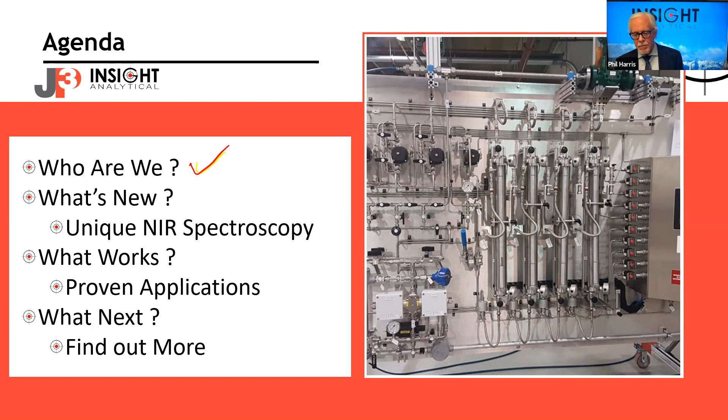So from the who are we side of things, JP3 is a company out of Austin, Texas. They're an equipment and information company that develops and sells online analyzers and data analytics solutions. And JP3 has brought some unique measurement capabilities together that enable us to implement things we've perhaps tried to do in the past in a way that's less maintenance intensive and easier to implement in online type applications.

As Chelsea mentioned, Insight Analytical is a systems integrator out of Calgary. We're a distributor and a technology development company as well. And we've had the privilege of being JP3's business partner and distributor in Canada since the launch of the technology in Canada. And Making Measurements Matter has been a vehicle, a website that we've been trying to put together, get more people involved in, to be able to give educational and informative webinars, whether it's about a product, an application, or a measurement issue.

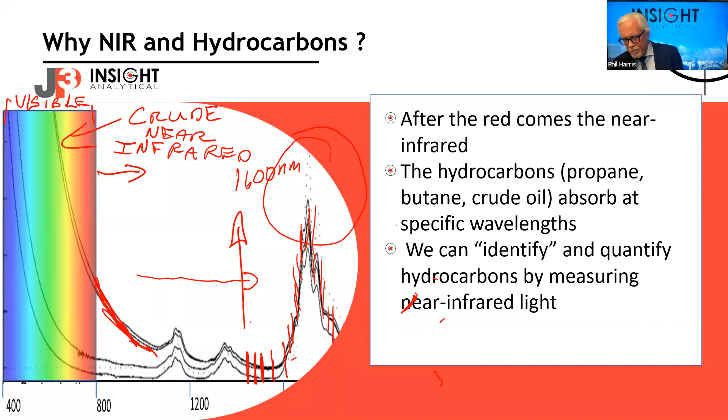So having a broadly tuned laser allows us to get the whole shape of that curve at high resolution with a monochromatic light source. The fact it's bright lets us deal better with samples like this. When we have a sample that's dark and dirty, it's got wax in it potentially or clay in it, we have difficulties getting conventional light sources through them. But we've got this intense bright laser now. So this makes it especially suitable for things like crude oils, condensates, things that would normally have too much background. We can start to use the intensity of these lasers to probe and get information in there.

The other thing about the particular spectrometer they use is it has a whole bunch of smarts built into it. It has automated wavelength calibrations, automated gain control and how bright the laser is, and that automated wavelength calibration. They do this kind of cool thing with two little Fabry-Perot interferometers, and it gives them a very precise wavelength calibration. And that lets the spectra from one unit be transferred directly to another unit.

One of the most impressive things I've seen done with this device is we can put a spectrometer out in the field, build a whole spectral library off that spectrometer, and move it to another spectrometer, and the library transfers over really well. So calibration transfer historically has been a difficult thing for near-infrared spectrometers. And the technology built into this device enables us to be able to do that.

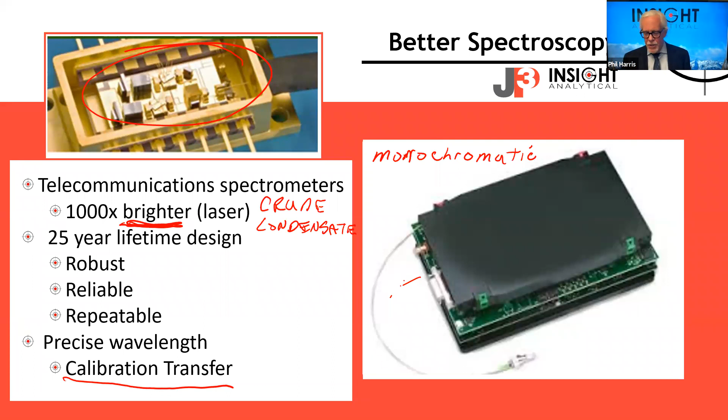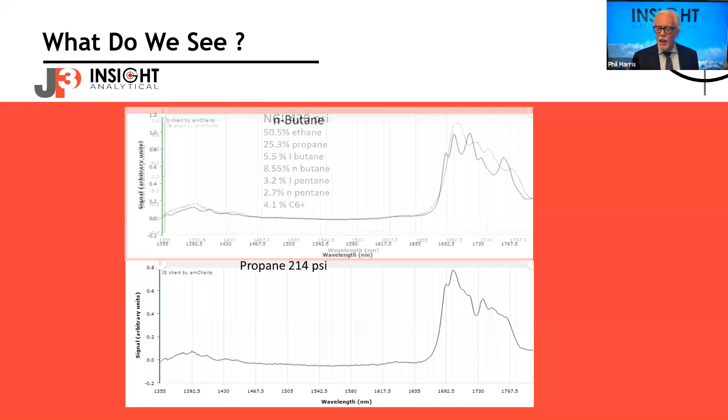So I want to talk a little bit about what we see when we look at spectra in the near-infrared. So this slide's animated. It's going to change on its own. The top spectrum is a natural gas liquid at 420 psi. So it's a mixture of ethanes and propane and butane and things like that. The bottom one was pure propane. The top one just turned to pure n-butane. And you can visibly look at these and say, by naked eye, I could tell the difference between these spectra. For individual components, it's not that difficult.

The problem comes in when we have things like a stabilized condensate, where there's a whole bunch of these spectra all sitting on top of each other. That's when the human eye, our ability to recognize the shape of the pattern and say what chemical is there, our ability starts to fall apart when there's a whole bunch of things overlapping.

But one of the other technological advances we've seen over the last decades has been massive improvements in computer speed. Computers are just faster, every year they come out and say, hey, instead of a 2 gigahertz processor, we got a 3 gigahertz processor. We got 8 cores instead of 4. We can crunch more numbers faster. And we've started to use sophisticated algorithms to detect patterns and shapes in all sorts of devices, including even personal use type devices.

Back when I went to university, computer science professors in artificial intelligence would say, well, we don't really know whether we're ever going to be able to get algorithms that can actually translate human speech because the waveforms are so complex and it's so variable. Well, everybody's phone does it now. Hey, Siri, tell me about that new spectrometer. And it does a Google search for you. And so we have these devices that use this ability to look at waveforms and patterns and turn them into actionable data. That's what we want to do with spectroscopy.

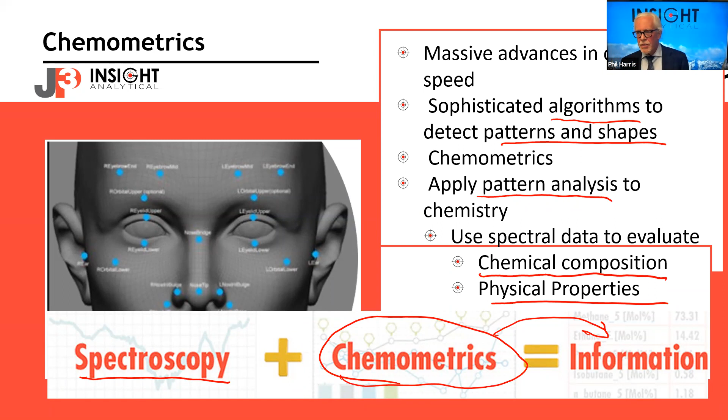When we look at sort of traditional analyzers, whether it's a chromatograph, whether it's an online vapor pressure analyzer, a lot of these were built around laboratory techniques where we could bring a sample in the lab, we can let it sit there for a day and have the particulate settle out of it. We can centrifuge it, we can do all sorts of things to clean up the sample before we try to take a measurement.

But when we go to do that online, if we pull that same sort of technology over there, we end up having these, if you like, sort of more complex sample systems, where we have to do a lot of things like continuous filtering, pressure regulation, flow control, flow regulation. And we also end up having a lot of small tubing runs in there.

Both of those work great in the lab, but if I'm dealing with the fluid that comes out of a crude oil well, or the fluid that comes off the bottom of a condensate stabilizer or an inlet separator at a gas plant, those things will have sand, clay, wax, bitumen, asphaltenes, dead mice. I mean, we don't know what's all going to be in there. There's going to be difficult things that make it hard to actually take a sample.

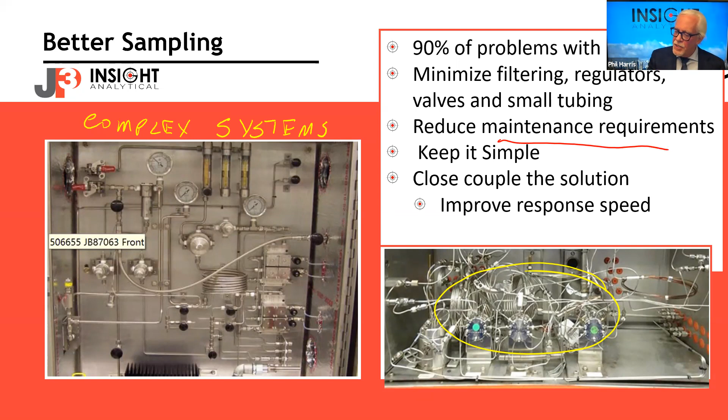And so if we want to reduce a lot of those maintenance requirements, what we end up looking at is saying, well, is there a way that I can keep it simple? Can I close couple this solution and improve response speeds and get faster response times?

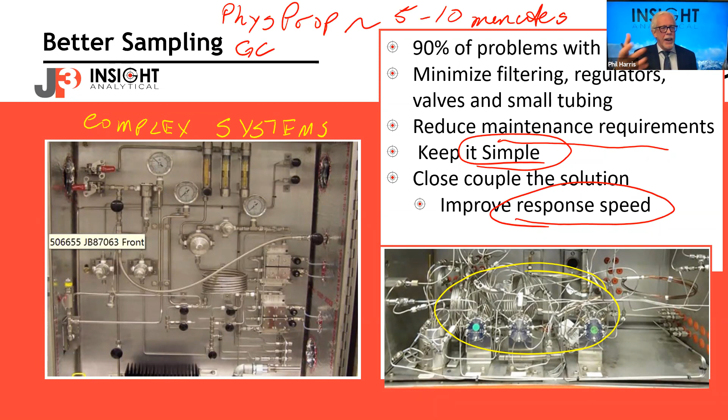Because many of these sorts of analyzers, a typical phys prop analyzer, like an RVP analyzer or a gas chromatograph doing composition, we may see response times on the analyzer in 5 to 10 minutes, and we may have even longer delays than that on the sample system. So a lot of the data that we get can be almost outdated by the time we get it, depending on how fast the process can change.

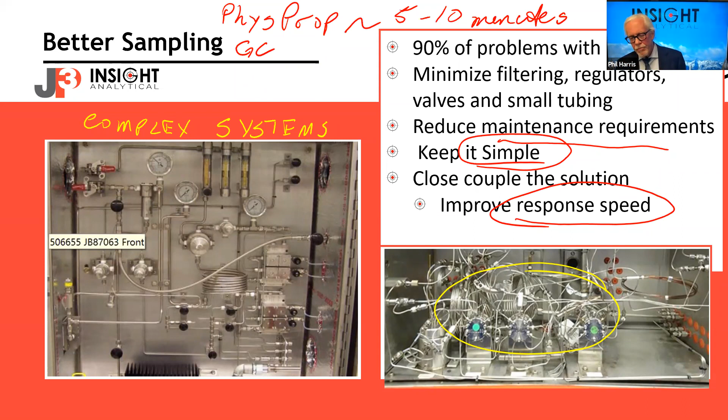So instead, there's a couple of pieces that have been done to try to take this measurement right to the operating process. And one of the pieces of that is how we actually get the beam of light to go through the sample. So the flow cell is basically a solid block of stainless steel, 316 stainless steel, which becomes important to us because we concern ourselves with corrosion and NACE.

And it has these nice large ports, 1/2 inch NPT, no 1/8 inch tubing. We want nice big ports that things can flow through easily. And so we allow our process fluid to flow through those nice big ports. Big tubing, doesn't plug as easily, can run a lot of flow, helps it be a little bit more self-cleaning.

Inside that block, we put a synthetic sapphire core. Looks just like this one. And the beauty of these is they transmit light really well. You can see it's clear as glass, and it transmits light very well in the infrared as well. But the other part of that is it's the second hardest naturally occurring material next to diamond.

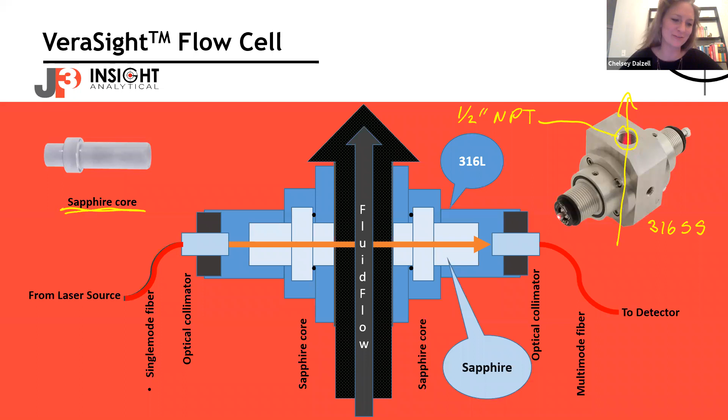So the thing with these is that because it's hard, we don't have to worry about it being scratched by sand, clay, bitumen, things like that. And so we can maintain good optical transparency for long periods of time. And in fact, because it's polished so smooth, the flow going by it, if we run enough flow velocity, it tends to become almost self-cleaning.

So we take those two sapphire cores and we put them inside of a block, kind of just like this one. So now we've got these two sapphire cores in there and a nice big flow path for our process fluid to run through. So process fluid is going to be running in. That's where my pen's just about to, there we go. So process fluid just runs in between those two sapphire rods.

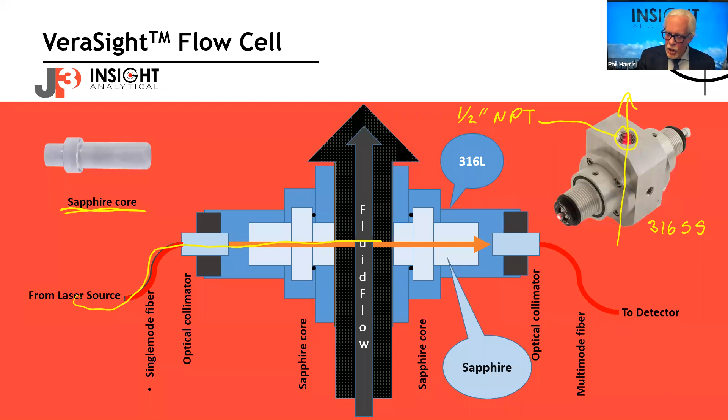The black pieces you see on the end here are just fiber optic collimators. So we connect fiber optics and shoot a beam of light through those sapphire rods and through the fluid that's flowing between there. So now we have this process fluid, whether it's crude oil or whatever. We take this beam of light, we shoot it through there, and we bring it back over to the spectrometer.

So the advantage we see here is that we have these large flow paths that are going to be resistant to being plugged by things like sand and bitumen. So this lets us kind of change our approach to measurement. Traditionally, we have pulled a sample out of the process, transported it through sample lines over to an analyzer building, and put this analyzer that really needs to be in a well-protected environment inside this analyzer building and tried to condition the sample so it's compatible with the analyzer.

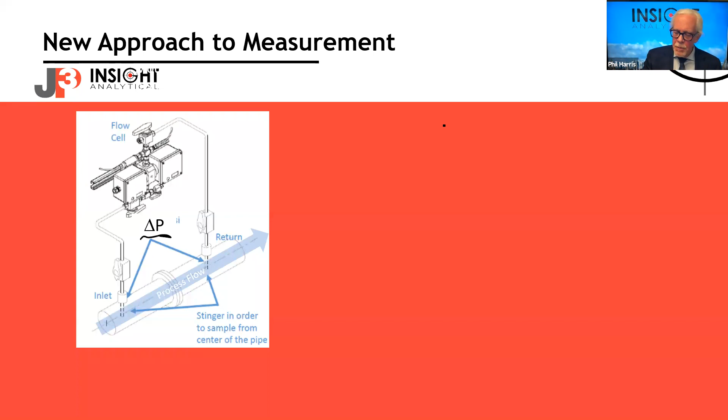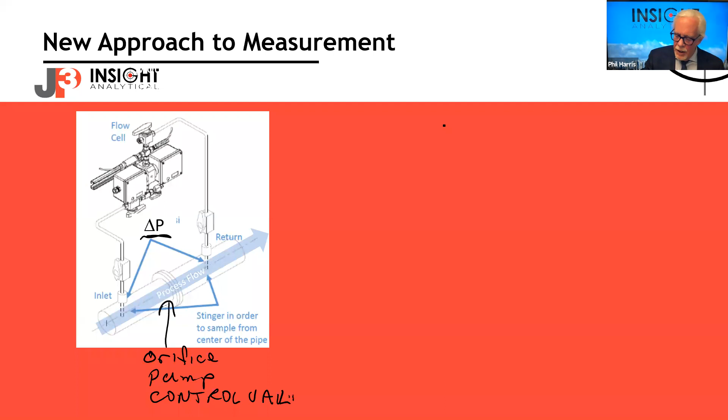Instead, now we move that flow cell out as close to the process as we can. We look for some source of differential pressure. You know, it could be an orifice plate, could be a pump, control valve, could just be a diameter change or some pipe elbows. We don't need an awful lot of differential pressure because we're really close and because our lines are really short. We typically try to keep these transport lines less than 5 meters. We run nice big lines like 1/2 inch tubing. So we have large diameters, so we don't have much pressure drop.

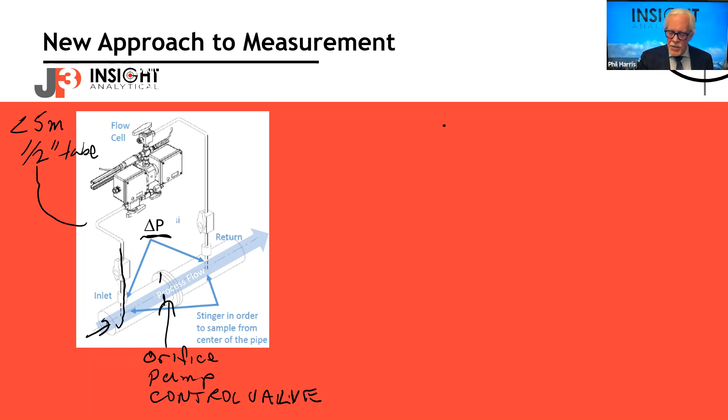If our direction of flow is going here and we have some kind of a flow restriction, the pressure is higher on this side, so it drives flow out through that flow cell, return back to process. On a condensate stream or an LPG stream, we'll see these running readily with 2 or 3 psi of differential. So we don't need a lot of delta P. We just need something to be able to drive some flow through that flow cell.

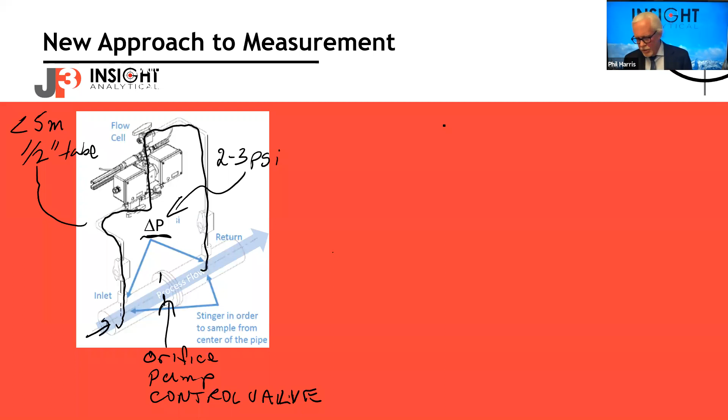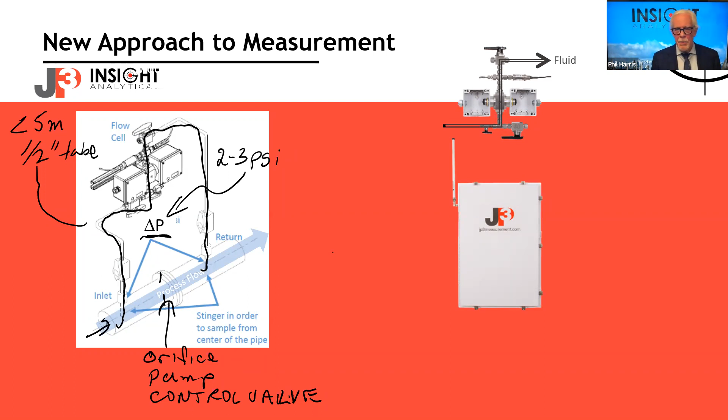So we have the process fluid flowing through that flow cell, and then we can mount the analyzer anywhere else. The connection is by fiber optics. We're not bringing process fluid back to the analyzer. So we mount the analyzer someplace like an MCC building, a control room, and we shoot a beam of light.

Sorry, Phil. I'm so sorry to interrupt you. There's a question. Puzic, P-U-Z-I-C. Yeah. Did you see that? Reiko, okay. Yeah. Hi, Reiko. You good? Yeah. Okay. Yeah, it was funny.

We were just teaching a class this morning and talking about where we put probes and where we take samples from, and how it's often not a good idea to go across control valves because the amount of differential pressure changes so much. And so you see people do it a lot still. You go to a lot of existing installations, and you'll see people sampling across control valves. But there's certainly issues because the differential pressure changes.

And as Bob said, we don't actually need a stinger on the return side. We can return it right back at the pipe wall. Did you see the second part from Robert? Yeah. Sourcing from near the centroid of the pipe certainly is where we want to be.

So we have that fluid flowing through there, and now we take this beam of light, connect it up over fiber optics, and shoot it through that flow cell, and bring the light back over to the electronics box here. This is where the spectrometer is, and this is really where the brain is. This is where we bring that fiber back, make those measurements of the spectra, and use those sophisticated algorithms that

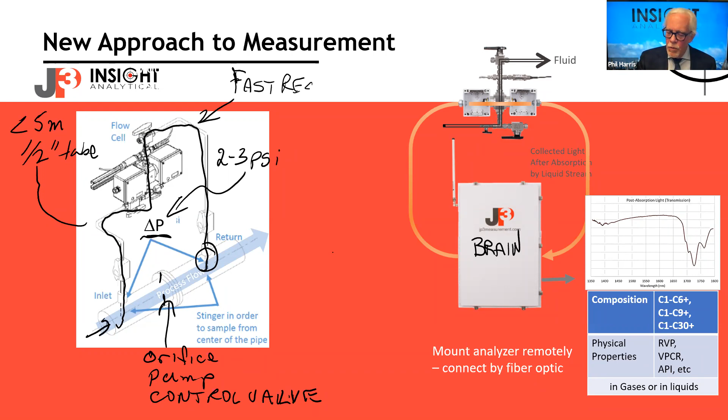Because we're close coupled here, mechanically, we get fast response. We have really short sample lines, so we get into that flow cell quite quickly. Similarly, because it's optically based, we can make the measurement quite quickly. So we get a measurement response that updates typically every 15 to 30 seconds.

So having that fast response lets us tighten up control loops. If we're doing things like blending butane into crude, or trying to optimize a deethanizer or a fractionation plant, we can make those measurements quite quickly and provide near real-time control.

One of the other advantages is that one of these boxes can handle multiple fibers, so we can do multiple measurement points. JP3 has made this available right now in three configurations: a single measurement point, which seems to be very suitable for things like a small crude oil blending skid, up to 4 measurement points, or up to 8 measurement points. So depending on how many sample points you have, we can put a different configuration in.

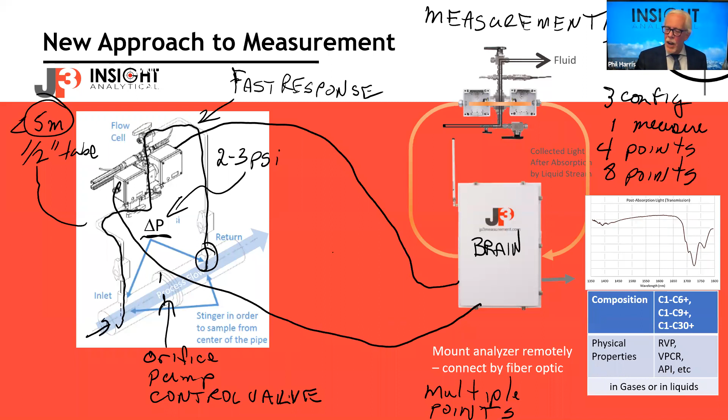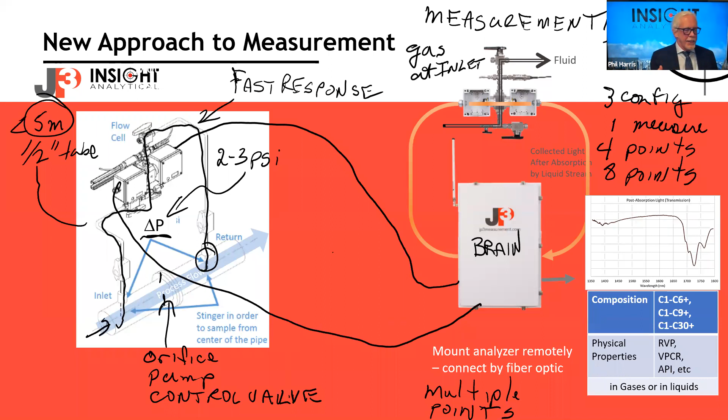And to do a second measurement, it's simply a matter of having a second set of fibers. So I can bring my second measurement out and bring it back. They're completely independent. They use the same spectrometer, but different flow cells and different fibers. So the one over here might be a gas phase measurement at a plant inlet, looking at compositions for allocation strategies. And the one over here could be a condensate stabilizer or a crude oil blending.

So unlike a lot of conventional technologies where we'd say, if you want to do a different application, you have to put a different type of technology in or a different configuration of the columns, we can basically use one spectrometer to do multiple different measurements at different places in the plant.

There's not a limit, or I shouldn't say that, there's always a limitation. The limitation isn't so much any optical parameters of the fiber as much as it's a custom fiber, so there's a cost increase if you go with longer fibers. So there's a point where maybe I should just put a second analyzer in instead of trying to spread these measurements out too far.

So there's a few unique things here now. We've taken measurement right out to the process point, which gives us fast response. We haven't tried to transport this sample, so we don't have to worry about phase changes. One of the big problems when we're trying to do measurement is we try to move a sample over a long distance through a piece of tubing. We get pressure drops or temperature changes, and phase change happens. We do all of our measurements here at line temperatures, at line pressures.

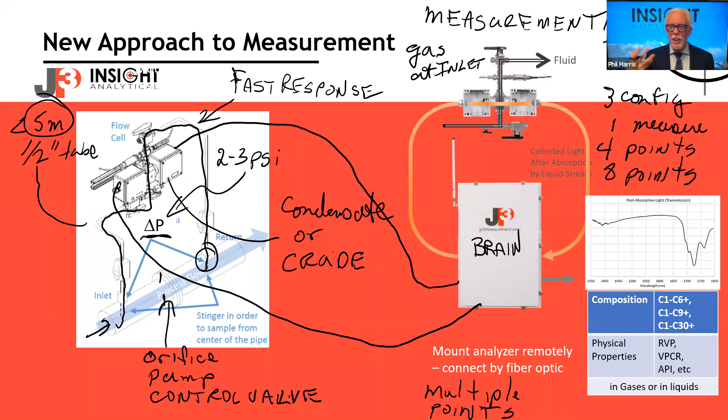In Canada, we have a CRN requirement. So in Canada, we can go up to 600-pound ANSI class systems, about 1,500 PSI. The flow cell actually had to be tested to 10 times that to get through the CRN requirements, so it was tested to 15,000 pounds. Sapphire, because it's the second hardest material, has great stiffness as well, mechanically strong. So we can run this on high temperature and high pressure processes.

Hey, Phil, there's a question in the chat from Andy. Are multi-point measurements made simultaneously or offset in 15 to 30 second segments, i.e. cycle time? Good question. I should have mentioned that. Because they're separate flow cells, they're offset. So we measure flow cell number one, and let's say we get an update after 15 seconds. We switch the laser to go through flow cell number two, get an update on that one. So if you had 4 measurement points, you may be looking at up to a 2-minute cycle time.

You can optimize that if you want to. If one of your measurement points is more important than the others, you can say, measure at measurement point 1 three times, then measure point 2, then go back to point 1, then measure point 3, then go back to point 1. So you can optimize that if you have one measurement point that you really need updated fast and the other ones you're willing to have go slower.

Installations then become, because we don't have to put in pressure regulation or a lot of flow control and a lot of these things, relatively simple now. We look for our sample supply point, bring a sample over to the analyzer. We will typically put in a flow switch, temperature transmitter, pressure transmitter. We like to know that we actually have flow to the analyzer. What are the temperatures and pressures of our sample?

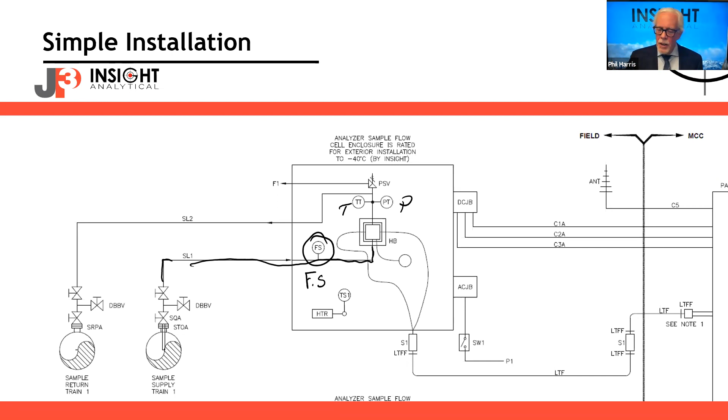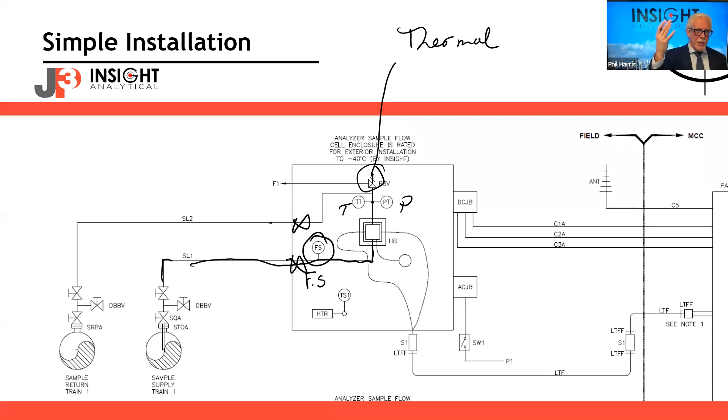The PSV that's here is just a thermal relief. We don't need a PSV for any kind of pressure protection because of the high pressure ratings of the cell. And realistically, there should have been ball valves or isolation valves shown here and here. The reason we have that PSV there is if somebody isolates the sample and the liquid heats up, when the liquid expands, we want to let it have a place to release.

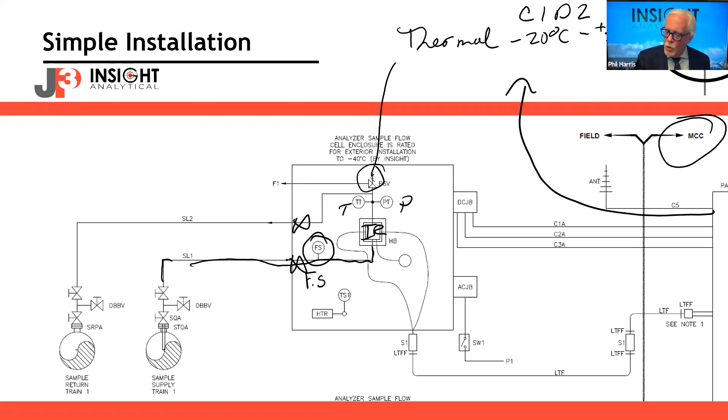The IR cell is sitting in the middle, and we bring the fibers in and out and bring them back to some safe place. Often we'll end up just going to an MCC building, a control room, any kind of cabinet where there's a bit of temperature control. The electronics part of this is Class 1 Div 2, minus 20 degrees C to plus 50. So in Canada, certainly we need a temperature controlled environment because minus 20 degrees C is a good day some winters, right? So in the US, a lot of times they'll just put this outside underneath the sunshade.

So to give you an idea of how simple an installation can be, this is a crude oil blending skid. There was a gas plant nearby that had depropanizer bottoms. Deprop bottoms are mostly butanes, pentanes, hexanes, and they were getting their deprop bottoms trucked away. Nobody pays a lot for deprop bottoms in South Saskatchewan, and trucking costs money.

Nearby, there was a crude oil battery, crude oil storage tanks. And they said, well, what if we pipe our deprop bottoms over? They blend it into the crude oil, make sure they hit the pipeline vapor pressure spec, and we get to sell our deprop bottoms now as if it's crude oil. So this skid is basically here to blend C4 pluses, butanes, into crude.

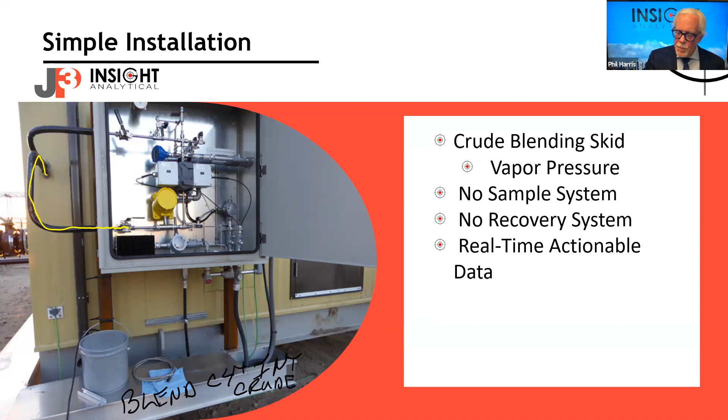So the blending is going on inside the building. Sample comes out, goes past my flow switch. My infrared cell is sitting right here. Temperature and pressure is sitting right here. Returns back into the blending skid. No sample recovery tanks, nothing like that. Just take it out over a little orifice plate, a little place where they get some differential pressure.

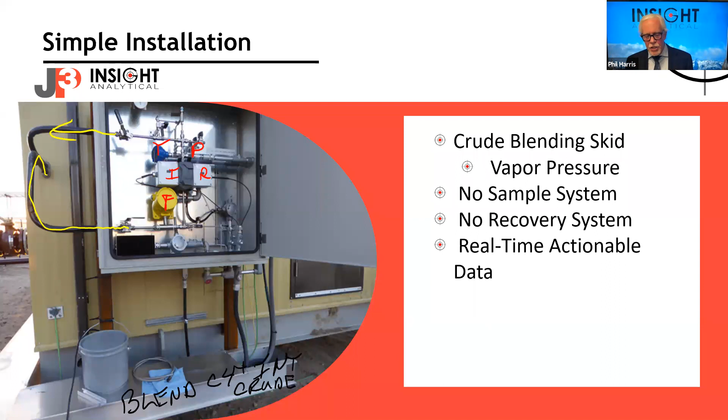Let's give you a bit of a zoom on what's going on in here. So, we have a little heated cabinet because it's in Canada. Explosion-proof heater sitting down at the bottom. Sample comes in, goes past the flow switch so we know we have flow, goes through the infrared cell, temperature and pressure measurement, return back into the blending skid. Fibers going in and out. Those go to the analyzer that's mounted in the control room for the blending building.

So, one of the things that we talk about is trying to get reliable measurements. They don't have an instrument mechanic out here. They don't have an instrument guy to maintain this. And so it just sits out there and chugs and runs and runs. We were almost at the point of wondering, well, are they actually using the data? Because we haven't had a maintenance call for this thing for anything.

And it's interesting, Doug's on because Doug manages our field service group and he gets a call on a Sunday. We haven't been out there for 9 months to do any maintenance, and the guy phones and says, we lost data communications over Modbus to the analyzer. We can't blend if it's not running. Can you help us get data comms up? No one had cleaned windows. No one had done any recalibration. 9 months of continuous operation doing vapor pressure with virtually nobody touching it.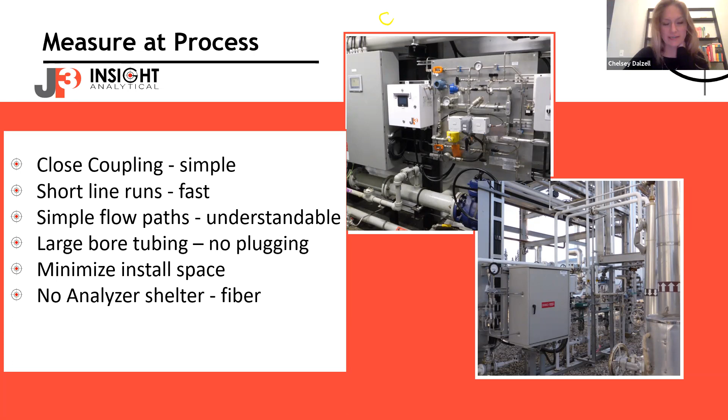Sorry, Phil, there's another question in the chat from Alan. Oh, thank you. Is the measurement temperature sensitive? Good question.

Yeah. So when we build models around these things, when we put one of these in, we have to pull samples for the lab and look at the spectra and build the model around that. And so we want to do that over the range of temperatures that you would typically operate at. And so if you see a really big temperature excursion from where you're normally operating, you may have to add additional data into the model.

Oftentimes though, if we're going on a processing vessel, if it's something like a condensate stabilizer or a deethanizer bottoms, those are often running around the same temperature most of the time. One of the nice things about liquid is if it's flowing, it's got a lot of heat capacity, so it doesn't change temperature very much as it flows along the tubing, as long as you have enough flow rate.

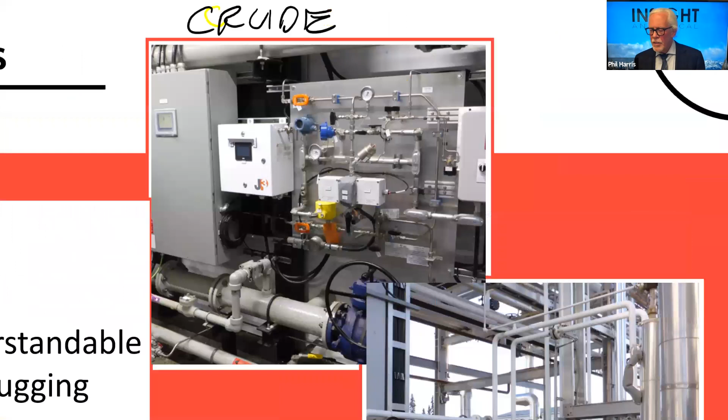So on some of these, like actually, I think the one up, is this one? Yeah, so on this installation, unfortunately, my pen won't draw. Let me just do this before I zoom that.

So on this installation, there's a second tubing run that runs around in parallel to the cell. It's all in 1/2-inch tubing. And what we're trying to do is keep a lot of flow going through those transport lines because it helps them to keep running at the typical operating temperatures of the facility. The more flow we put through there, we have a fixed amount of heat loss to ambient, and so we don't change temperature of the product much from a cold day to a hot day. So there's one flow path that's bypassing and one that's going through the cell.

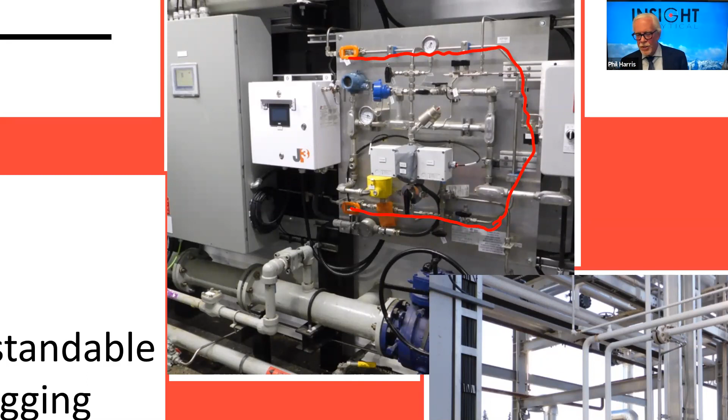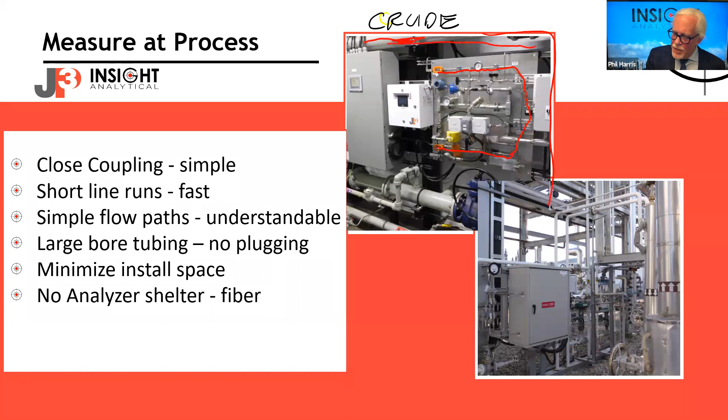So again, this is a simple installation on a crude oil blending skid. We have crude that's being diluted with butane running through a pipe that's off the side of this picture and then returning back. One of those single stream spectrometers sitting right beside the panel. On the panel here, our sample comes in, goes through the flow cell, returns back to process, and we have that little bypass loop. And we're getting a continuous measurement here of what some people would refer to as RVP. The spec describes it more as VPCR4 now, so the vapor pressure at a 4-to-1 expansion ratio.

And so the client specification is, on the blend, you can't go more than 95 kPa. The more butane he can push into that crude oil, he buys butane for $10 a barrel, sells his crude for $50 a barrel Canadian, puts that butane in and sells it as if it's crude oil. It's like watering down your whiskey. You get to sell an inexpensive product as an expensive product, and so you get to increase revenues there, right?

Again, this one is sitting on a deethanizer. The deethanizer tower is right over here and the sample panel is sitting right beside it. Close coupling makes things simple and short line runs make it fast. Simple flow paths, not much for a technician out in the field to try to figure out where it goes. It goes into this manifold and then it comes out here and out there. Basically, it's a 1/2-inch tubing run into the analyzer, 1/2-inch tubing run out. Large bore tubing, it doesn't plug.

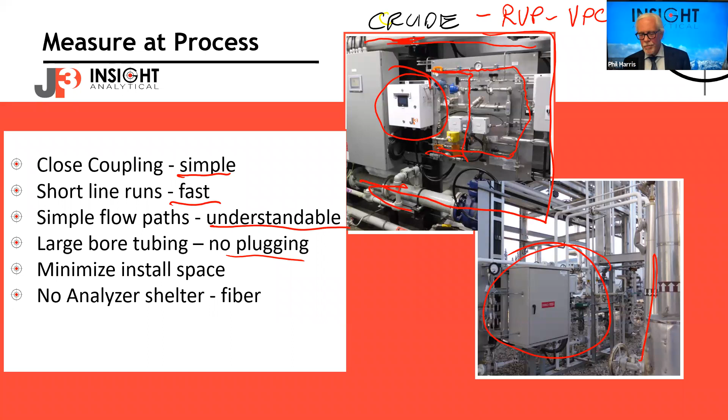So here's an example of that. Out there in the Canadian snow, we had this cabinet mounted out at the bottom of a condensate stabilizer. It's very similar to the cabinet that you saw on the crude oil blending skid. Flow switch, temperature, pressure transmitters. Mounted out in the middle of the plant. Over here is their MCC building.

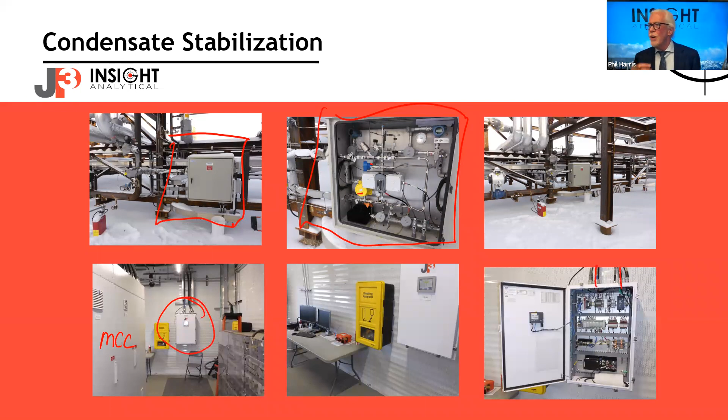They put the infrared analyzer up on the wall, dropped power and fiber into it from the top, and it now just sits out in that building. There's no gas coming back there. We don't have to put gas detection in. We don't have to put any special controls around this device now. Really cuts our installation costs.

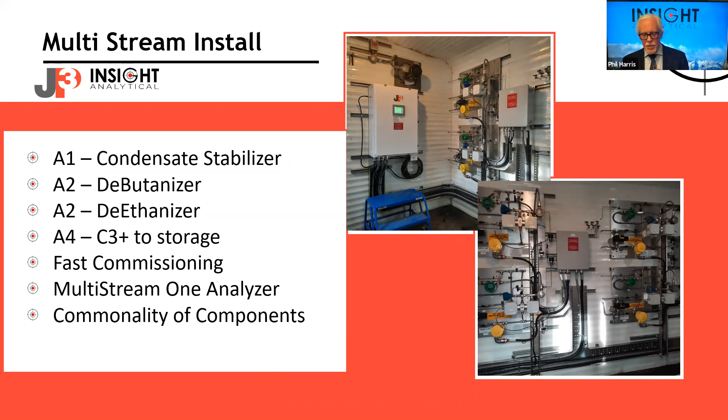Multi-stream installation that we just did recently for a gas plant up here. 4 streams: condensate stabilizer, fractionation plant, debutanizer, deethanizer bottoms, some C3+ that's going to storage. We build all the panels at our shop, drop them out in the field, mount them on the wall, and hook up the analyzer. Again, when we zoom in on these, those are two separate flow paths.

Infrared cell; the two white boxes are just protecting the fiber. The yellow part is the flow switch, temperature and pressure right above them. This panel right below it, actually the green, I think, is the temperature transmitter. We use E&H transmitters out there, Doug. Is that the green ones? Yeah. So we've got Foxboro, actually. It's an old Foxboro control system type plant. Right. So we use Foxboros for the transmitters.

And right, this is an existing GC building. They pulled them out to put this in. So what happened was the plant had GCs trying to measure the condensate and the debut bottoms. And they said that because of the maintenance costs, between carrier costs, replacing injection valves, having to do maintenance on stream switching and all that sort of thing, they were spending $50,000 a year just on maintenance parts, never mind on the labor side of it.

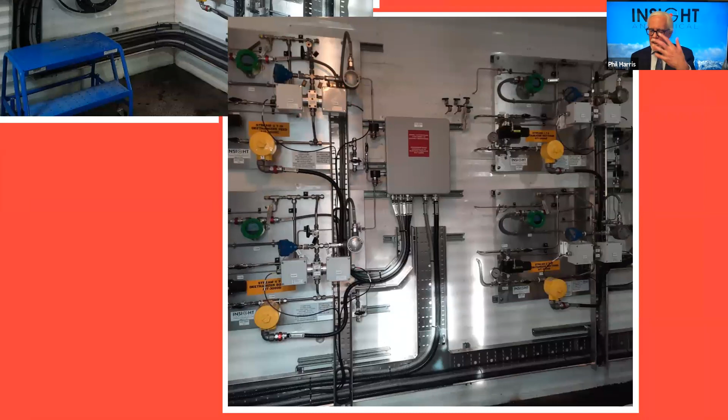And they said, well, if we go in there with no moving parts and put a system in that gives them the same data, but 10 times faster and with less maintenance, they can see an opportunity to optimize production. So we have two panels mounted right there next to the analyzer and the other two panels mounted on the wall nearby. So there's 4 streams inside this little building with the infrared spectrometer right beside it. Fast response, all the data coming in over Modbus allows them to put better control systems in place.

I'm running a little bit late here.

So we look at advantages and disadvantages of both methods. The big advantages of the near infrared methods is that we can measure at process temperature and conditions, as compared to transporting a sample and worrying about phase change along the way. We can use large bore tubing and not put in filters and regulators, so we do those measurements without a bunch of those maintenance parts. Another client said on one of their condensate streams on a blending skid they change filters every 2 or 3 days, and the filter costs add up.

Fast response time, typically better than 1 minute, often 15 to 30 seconds. We can do multiple measurements with one analyzer, composition and physical properties all at the same time. With traditional analyzers, I'd have to put in an individual GC to do the composition and then a physical prop analyzer to do cloud point or pour point or vapor pressure. The advantages potentially of a GC are that they do direct measurement, measuring an individual peak to get to a component, whereas on near infrared or any other inferential analyzer, we have to build models.

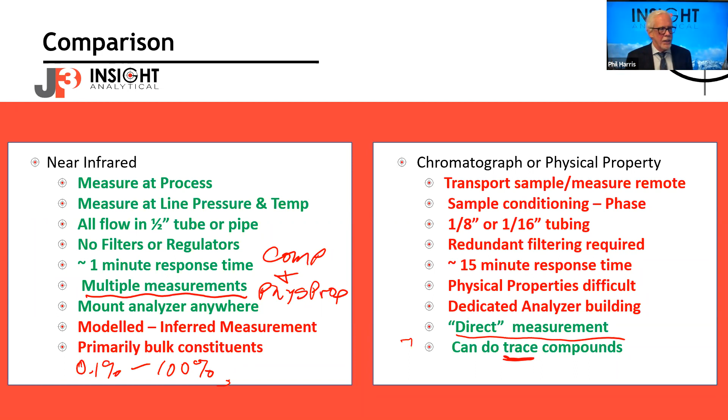The other advantage potentially on a chromatograph is they can do trace components. They'll go down to single-digit ppm measurements in complex mixtures, whereas with spectroscopy, because most of the spectra overlap, we're primarily looking at bulk constituents, in the 0.1% to 100% range. Whereas a GC might go down to 1 ppm or less, right? So as we go through,

That question from Michael Sprague: deployments in fuels blending for product certification. Greg or Steve might be better at answering that. We haven't done as much fuels blending up here. We've done butane blending into crude, butane blending into condensate. But for blending into gasoline, we haven't done that application up here in Canada. I don't know whether any of the JP3 guys from the US might want to jump in.

Hey, this is Steve. Phil, yes, we have done those applications in the States. For gasoline, either blending in or the final control point on the downstream side of the blend. So things like vapor pressure in gasoline, right? Yeah, RON, MON as well. DVPE as well. So if Michael wants to reach out with any more details, just circle back.

I got a few questions. Paul, how you doing, man? Well, there's one before that.

Dealing with water and moisture content impacting the spectrum. It all depends on the amount of water and moisture. So typically, if I just quickly go back here, sorry, just bouncing back to where I can show a spectrum. Typically, we'll see water in the NIR right around here. Actually, that's probably shifted a little bit more that way. I think its center is close to 1460 or so.

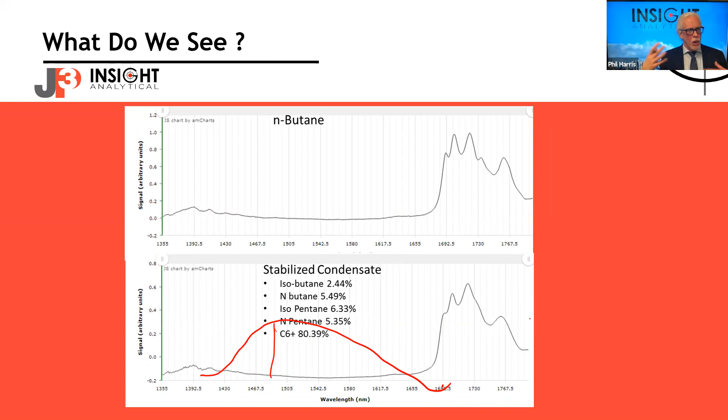And so if it's not a lot of water, we'll just see it as a background hump that's there. We can still do all of our spectroscopic measurements. If you get huge amounts of water, it can start to overlap some of these. But we had a client who was doing startups on a condensate stabilizer, and Doug and our other service guys

would look, we have satellite connection or cellular connection to the analyzer, and they'd look at the analyzer and phone the plant and say, you guys have water in the bottom of your condensate stabilizer again. You guys got to look at your level control on the inlet separator.

So we can deal with some of it in the background, and it does impact the spectrum. We'll sometimes generate alarms saying we've got an unusual spectrum shape here because there's water there, but we can often get a decent analytical measurement.

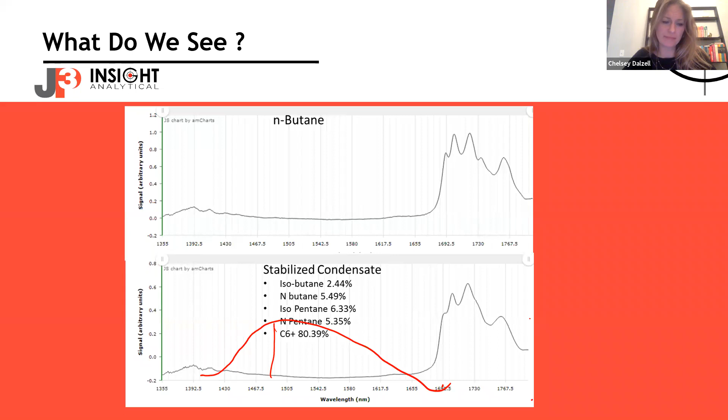And then Paul's question as well. Did you see that? Yeah, I'm just seeing it now. Hey, Paul, how you doing, man?

No, we don't use real-time input of the temperature variations as part of the chemometric models. We try to build our models across a wide enough range of temperature variations that we kind of minimize the sensitivity to that.

And the models, as you put in more principal components, or latent variables, you kind of build some of that in as these are the kind of spectral changes we see, but it's not used as a part of the inputs. We don't typically do online validation, so we don't run a validation fluid.

What we usually do with customers is say, pull a sample, check. Most custody transfer agreements are based around lab results. And so we tell people, look, pull samples, compare us to the sample you just pulled from a qualified lab, and see if we're still in specifications.

A lot of the customers that we have that do things like blending will have a local lab, and they'll just say, well, my lab can only get me 4 or 5 samples a day. They get to see how the analyzer's comparing to the lab, but they do real-time control with the analyzer.

And then the last one, chemometrics is performed by a commercial. Yeah, okay, got it. I have Eduardo, how you doing, buddy? How's things in Brazil? You have to get me down there again.

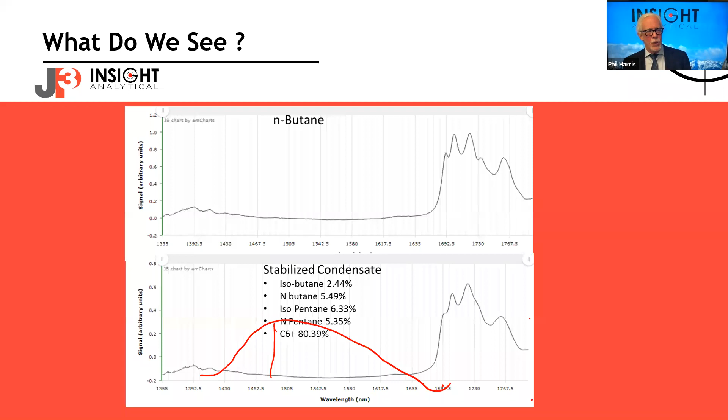Yeah, the chemometrics is done basically using a MATLAB-based platform that's running on the analyzer itself. So they have not traditionally been using third-party chemometric software to do it. With a lot of the installations, especially launching a technology like this as a relatively new thing in North America, a lot of what we've done to date has been using JP3's chemometricians to build the models based on the software that's there.

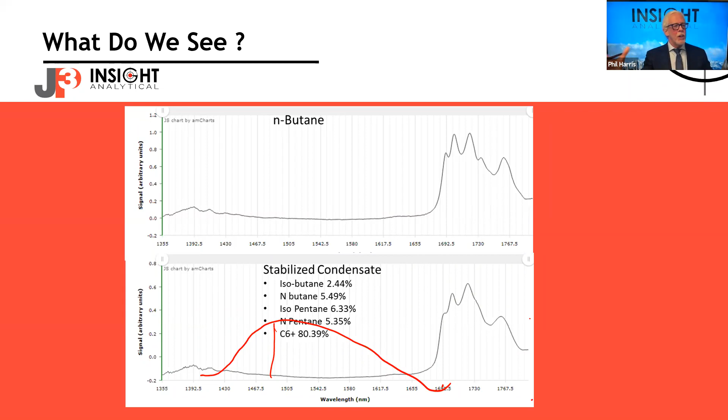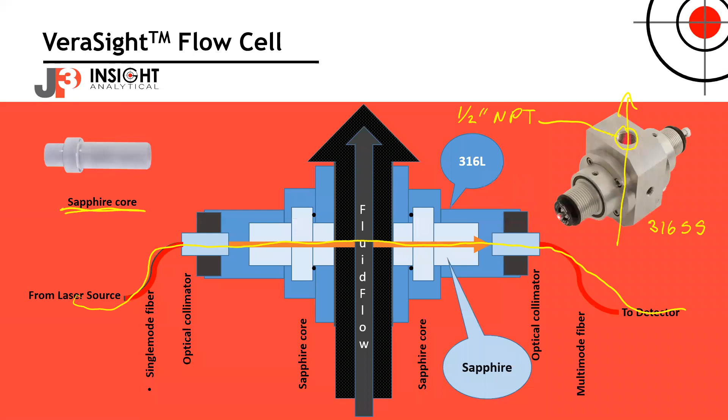With looking at more international markets, the ability to use other software packages and let people do their own chemometrics is certainly becoming more and more important. And I know, Eduardo, you guys at Petrobras have done a lot of the chemometric stuff down there. I've looked at a lot of the papers that have come out of Petrobras. So I'm going to skip through some slides here.

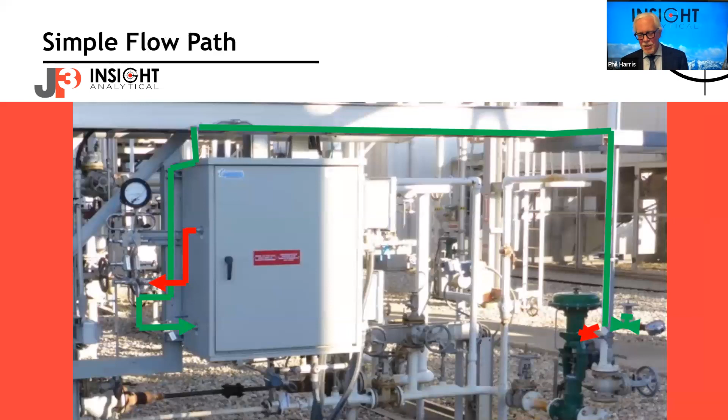So again, you were sort of saying there's a... Sorry, Phil. Paul is asking another question. Does the sample cell have a means of easy cleanup for possible fouling? Yeah, fouling. It's real easy for me because I'm not the guy who has to go out in the field and do it.

Doug is, but Doug's done a lot of them, they're pretty quick. How long does it take you to do window cleaning, Doug? It's not very long. Start to finish, 20 minutes easily. Yeah. If you really want to see, go to YouTube and punch in JP3 and you can see a demo of it.

It's basically 4 bolts on either side of the cell, lets you take it off and get the sapphire rod out. And then it's just cleaning the sapphire rod. And because it's so hard, a lot of times the guys will just use a rag and brake fluid. Brake fluid's almost this universal solvent.

For some of our systems as well, where they had wax issues, because the analyzer is continuously measuring how much light transmits through the cell, if the optical transmission drops, we have a system in place where we backflush the thing with toluene, and that dissolves any wax that might have built up on the cell windows. So we can automate that cleaning as well.

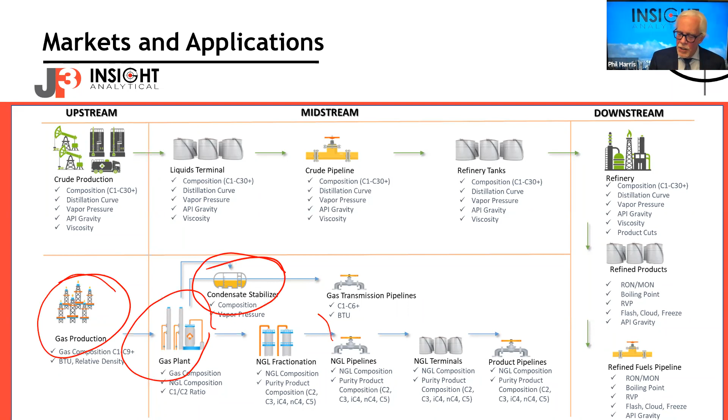So over the course of the seminar series, we're going to try to touch on most or all of these applications. But where I'm going to focus today is more on this gas plant, condensate stabilization, and NGL fractionation side of things.

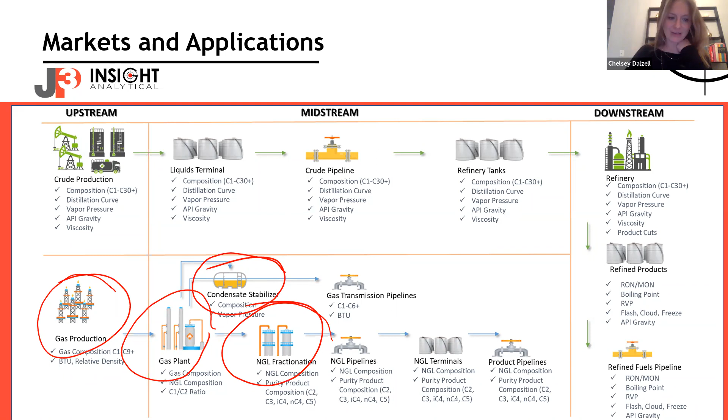So one of our first applications, the first installs in Canada, was really interesting for us because we were a relatively new company. We're bringing this technology into Canada, and we get an RFQ from a big engineering company, and they say, our client wants to measure butane in natural gas condensate. So what you guys in the US refer to as natural gasoline, up here we just refer to as condi, but it's kind of a C5 plus stream.

And the engineering company says, we want to measure butane in condi. So we run through the whole job, engineer it, build it, ship it, install it out in the field, and meet the process guy and the measurement guy. And they go, well, butane's an important number to us, but really what we'd like is to know the C1 through C4s in liquid volume percent. Our process guys would like to know C1 through C12 in mole percent. And we'd like if you could give us the vapor pressure too.

And we're on site, and we talk back with the chemometrics guys back at JP3 and kind of go, what's involved? And they say, you're going to have to pull a lot more samples. We're going to have to spend more time building models, but we can model all of that off the one installation. So we ended up being able to tell the client, look, there's no hardware changes. We just have to pull more samples, do more lab analysis, build bigger models.

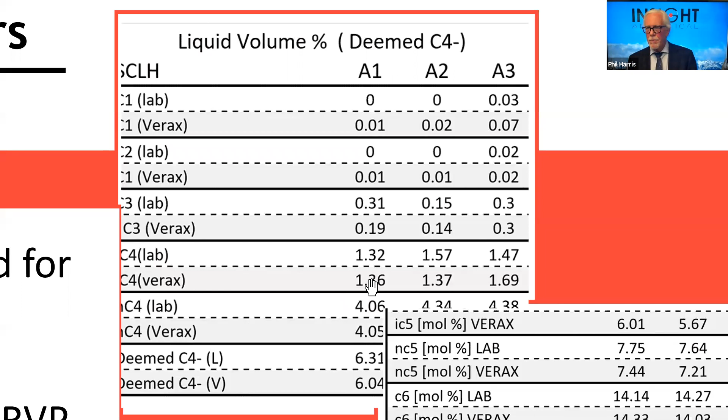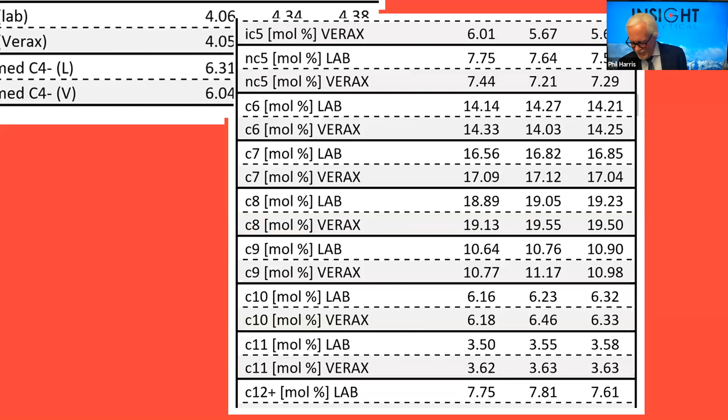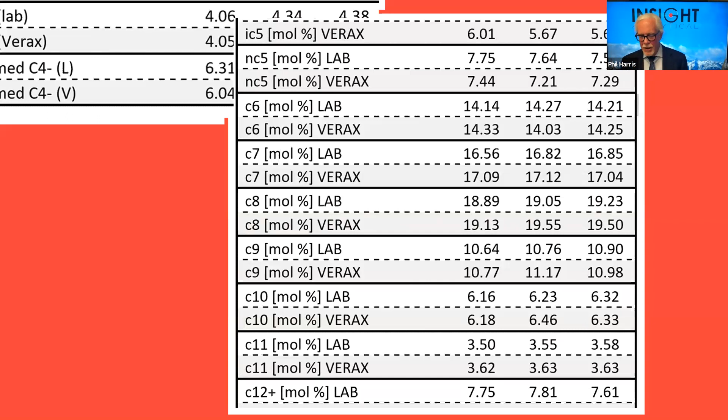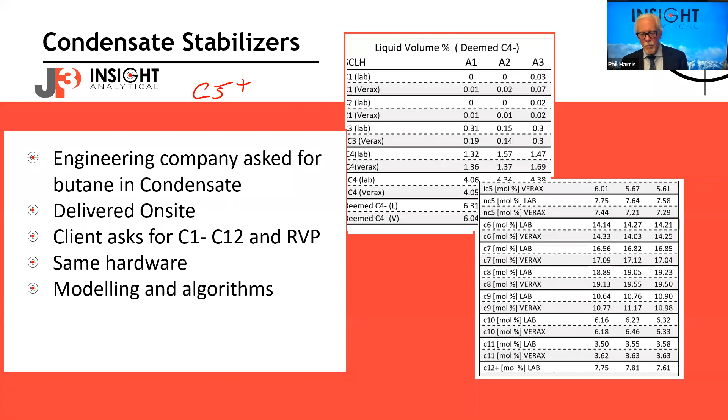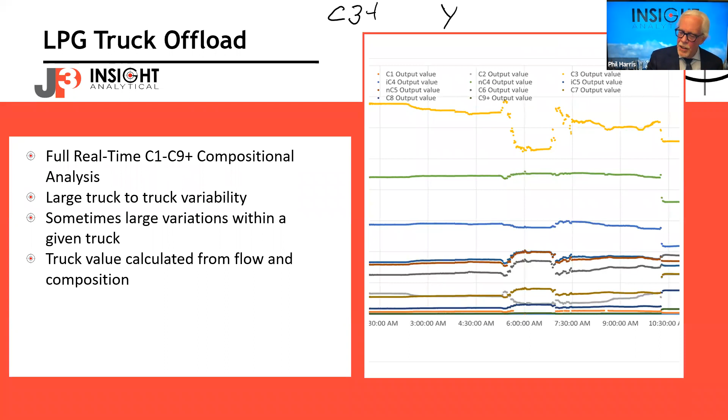So exact same hardware, almost a completely different analysis set, all done and providing them real-time results. We also did a truck offload for this client, and so they were looking at trucks coming in, and as a truck offloads, this is a C3 plus. What we up here in Canada refer to as C3 plus, the US tends to refer to as Y grade. But it's a C3 plus hydrocarbon stream.

And what they wanted to be able to do was when a truck offloaded, take a data point every minute, look at what flow they're getting off the Coriolis meter every minute, and do a flow weighted average of the composition of the truck. We gave them basically a full C1 through C9 plus every minute, and they're flow weighted averaging that and saying this is what the value of that truck is.

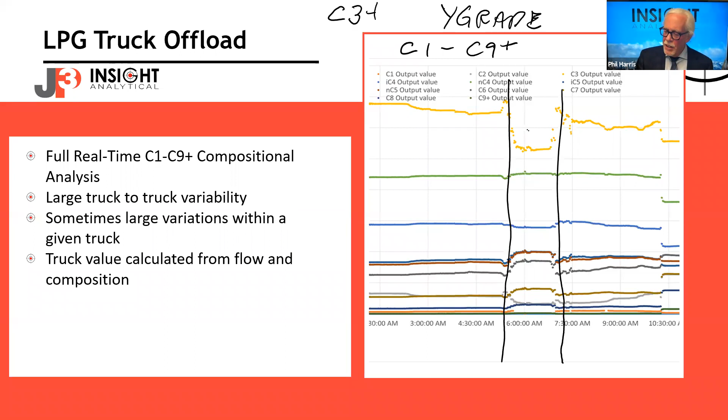And the reason they want to do it, you can kind of see at the end of this chart. This particular truck that came off is relatively low in propane and higher in butanes. And the next truck that comes in was higher in propane and much lower in butane. And the butanes and the heavier have a lot more value to them. So they wanted to be able to say, how do I evaluate each of these trucks?

The alternative, the way people have traditionally been doing a lot of this, is once a month, they would go and pull one lab sample and say, hey, this is a lab sample from, who am I going to pick on here? This is the sample from Eduardo's plant. And this is what he gave me on this sample. So that's what he's going to give me all month.

Well, Eduardo's smart. He knows I'm coming out there on Tuesday. So he makes the best product he can on Tuesday. And then I pay him the most money all month. So instead, they said, I want to be able to look at each truck that comes from every plant in real time.

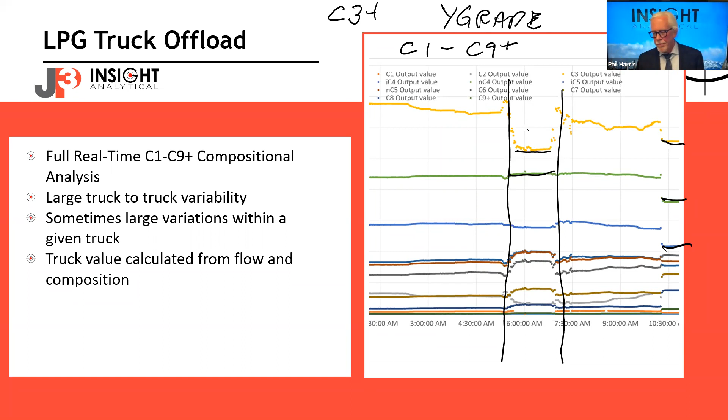From an installed base perspective, there's over 225 installations of this technology across North America now, over 600 measurement points, pretty much in every active region where there's drilling going on and production going on. There's a good mix of crude, condensate, NGLs, natural gas, NGL refined products.

Okay, good question up there from Steve. Can you read the question maybe just for me, or do you want me to? No, I get it. I was wondering if Steve, is that Steve Bernardin? Yeah, I'll get to that one right away. Yes. Hey, Steve, how you doing?

Yeah, and so we've put in a number of applications. We just installed one. We've got 3 more that we're building in the shop right now up in Canada. So doing the offline modeling. What we do is we actually don't do offline modeling. We go out to the installations, pull samples, trigger the device to say we're pulling a sample right now. So the device stores the spectra that it saw during that sample pull.

And we send that sample off to the lab, whether it's a local lab at the plant or a commercial lab like SPL or Maxxam, and we get the lab results back. We have cellular communication to each of the analyzers, so we can pull the spectra that we got and the lab results, and have the chemometricians back in Austin, Texas, build the models as needed.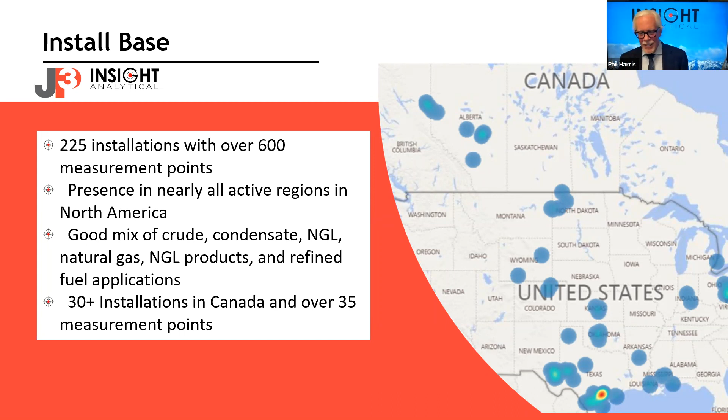So on natural gas plants, the things that we look at: we can do the raw inlet gas. These rich BTU gases are coming from shale wells. We can handle products like the dry sales gas as well, do the C5 plus streams and all the Y-grade NGLs. The benefits, of course, being fast response and minimal maintenance.

So now we can start to put in tighter controls on some of these things and allow them to optimize how they're running their condensate stabilizer. Even looking to say, well, based on pricing today, should I run leaner or richer on my deethanizer? Should I go into ethane recovery mode and run in different modes?

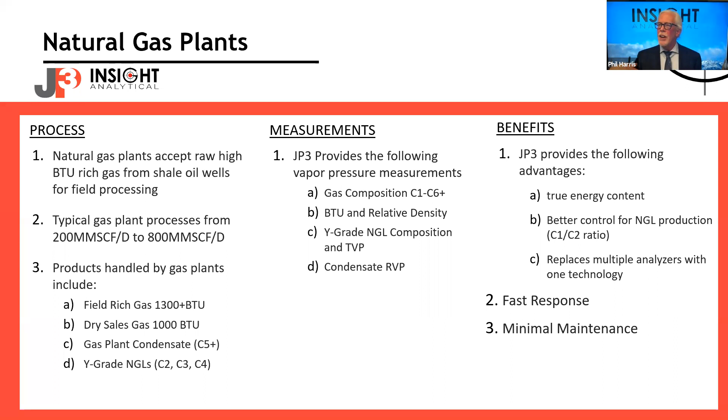I use Gregg's figures. We have a completely different issue when it comes to condensate or oil, especially from the US and Canada. US oil tends to be high vapor pressure, got a lot of light ends in it. Canadian oil tends to be low vapor pressure, really heavy. And so in the US, they're often trying to boil off all the light ends and get it down to a vapor pressure spec so they can put it into a pipeline.

In Canada, we're going, how much inexpensive stuff can we blend into this crude oil before I put it into the pipeline? And so both of them, though, come down to optimizing either a blending facility or a condensate stabilizer.

So typically, when we look at something like condensates, or this could be NGL recovery as well, we bring a liquid in at the bottom side. We're taking some of that liquid and changing its temperature, recirculating it back in, using that to boil some vapors off onto the overhead side. So vapors going out over here, and we have product going out on this side. And we want to know, does that product meet specification or not?

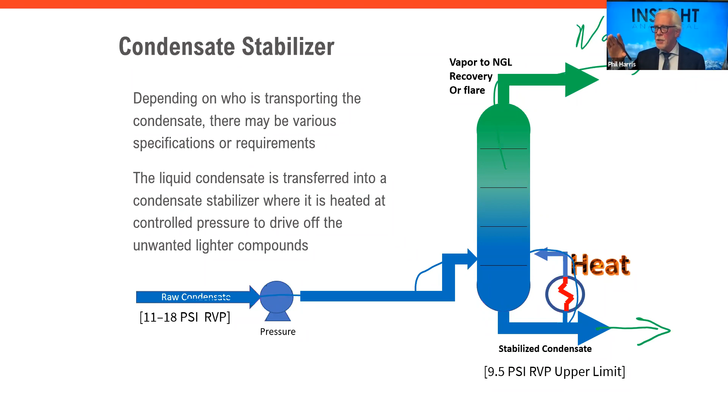Generally, the tighter I can run to the specification, the more money I can make. And so, this one uses a little bit more of a Canadian type example, which is in Canada, we're allowed to have about 5% butane in our condensate. So if a guy overstrips it and he's stripping it down to 2% butane, he ends up pushing out less volume. There's an extra 3% production that he just lost by stripping it and pushing it over

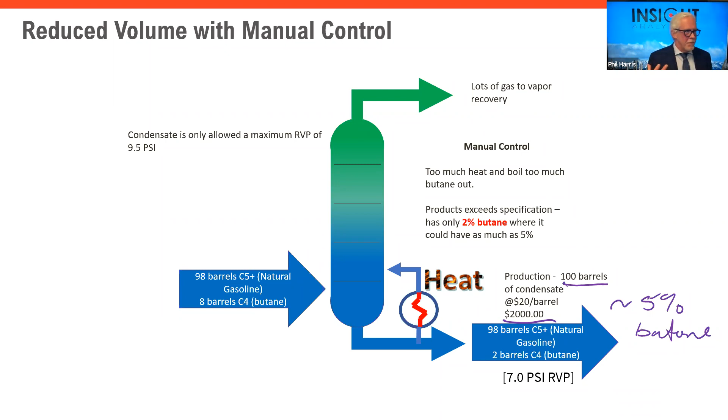the vapor side. And so, in simple, we did really small volumes here, but 100 barrels a day, that 2% at $20 a barrel for condi costs them $2,000. Now, when we talk about condi running around $50 a barrel now, and when we talk about things like the Encana condensate stabilizers being 4,000 cubic meters a day, 25,000 barrels a day, 1 or 2% increased production is a lot of money. We just did a project for a client who has gone from 400 cubic meters a day to 404, and it prints them about $2,000 a day.

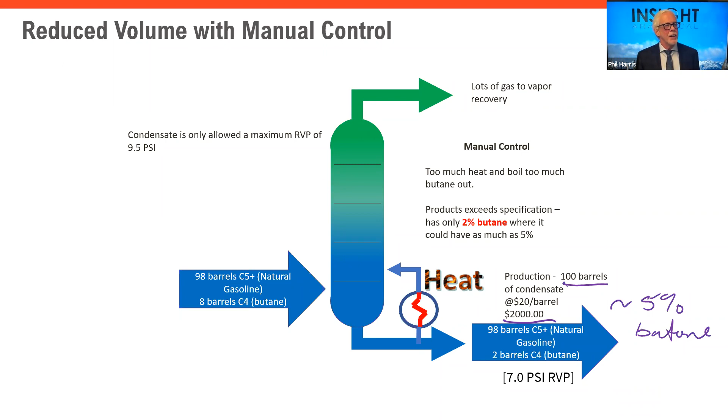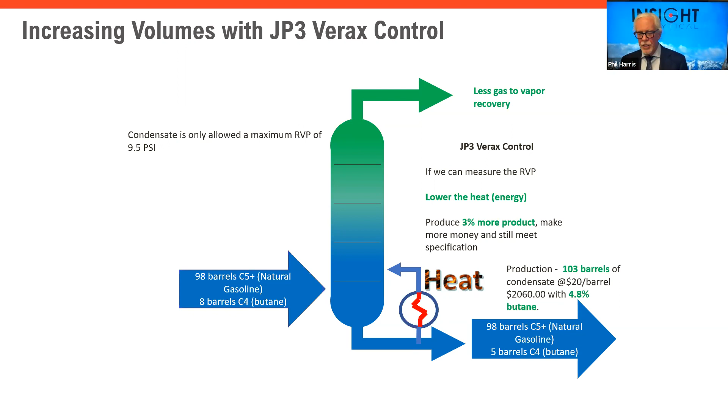So we can increase the volumes by running tighter to the specification. And in this case, we upped it by about 3%, and that allows us basically to increase production yields. We also get better vapor pressure control. So this was a plant that had like a heater treater where they'd overboil for a while, let it cool off, overboil for a while, let it cool off. And instead, when we put the analyzer in, we allowed them to control closer to their set point. They had to stay under 9.5 PSI in the US. ROI comes from just not overboiling; you produce more product.

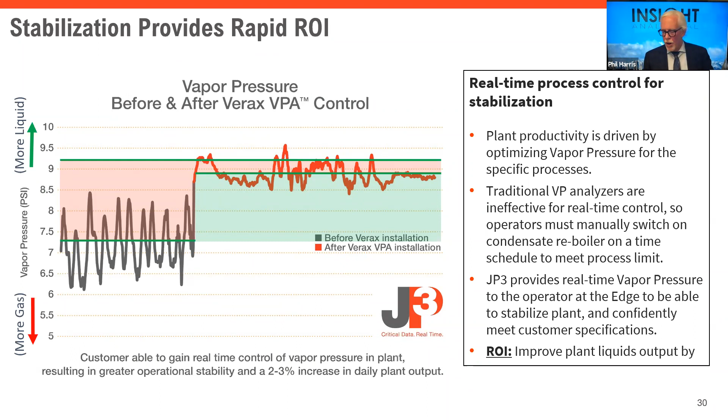So we give a couple of case examples in here. In this case, it's a pretty big condensate stabilizer, almost 27,000 barrels a day. Manual control, they are running at 7 PSI. When they put the analyzer in control, they ran at 8.5 PSI. The increased yield that occurred because of that in a year generates about $2.9 million. So when we start looking at these processing vessels, what we're looking for is applications where if we can make a tighter measurement, if we can run closer to product specifications, we can increase yield.

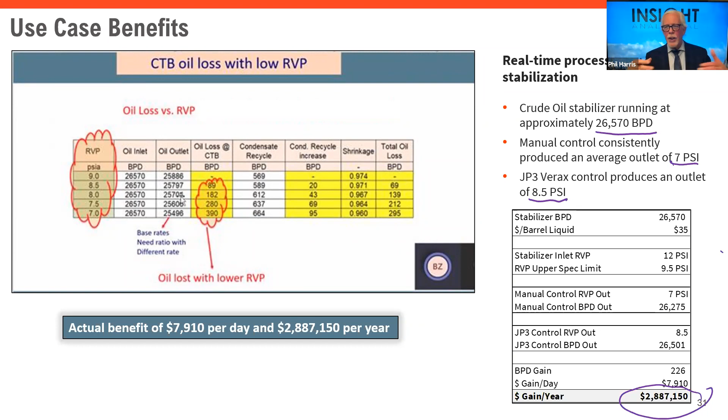I kind of joke about it in some ways and tell people the reason we put process analyzers in is so we can make the worst possible product we can that still meets specifications. Because often that means we have less processing and higher yields. And so here, we might have an end user who says, well, I don't really want the light ends. Well, the specification says they can be there. And so now I can increase my product yields. You'll get these slides as well.

So there's another use case evaluation here in terms of looking at gas plant condensates and lease condensates and trying to run at different vapor pressures, and showing that if we increase the vapor pressure at different operating points in different operating scenarios, based really just on the volume that's being run through the condensate stabilizer, even the smaller case, which is a 5,000 barrel a day condensate stabilizer, is talking about yields of $600,000 in a year. So we can see ROIs on analyzers that occur in several months.

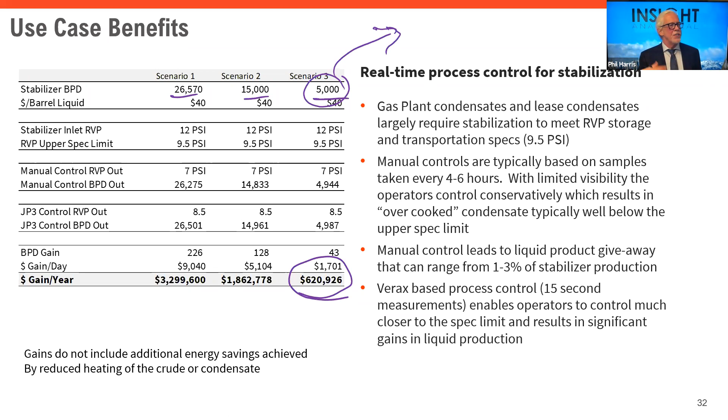When we look at frac plants, we can go right across the frac train from NGL inlets, deethanizers, depropanizers, debutanizers, butane splitters, C5 plus streams. And again, fast response, minimal maintenance. And the important thing is these real-time quality measurements. It allows us to improve our process control.

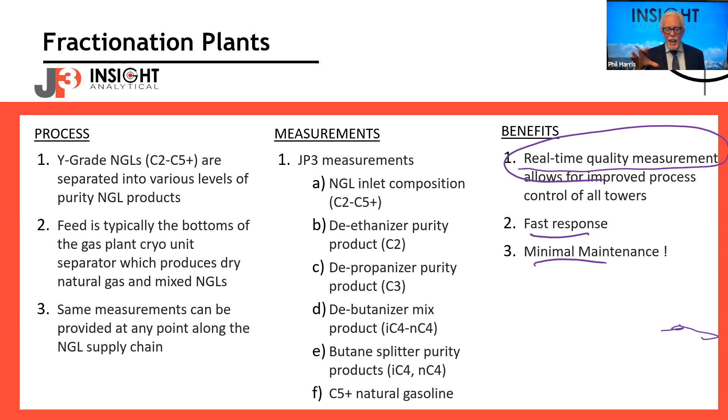Truck and rail terminals, again, looking at product quality and when it's safe to offload or not offload. We have a client in Southern Ontario that just says, I want to know when I'm offloading a train car into my butane storage cavern, is it really butane? Am I putting the right product into my caverns? Putting the wrong product in can cost them an awful lot of money.

Sorry, I ran through a little bit fast in the end because I realize I'm running overtime here.